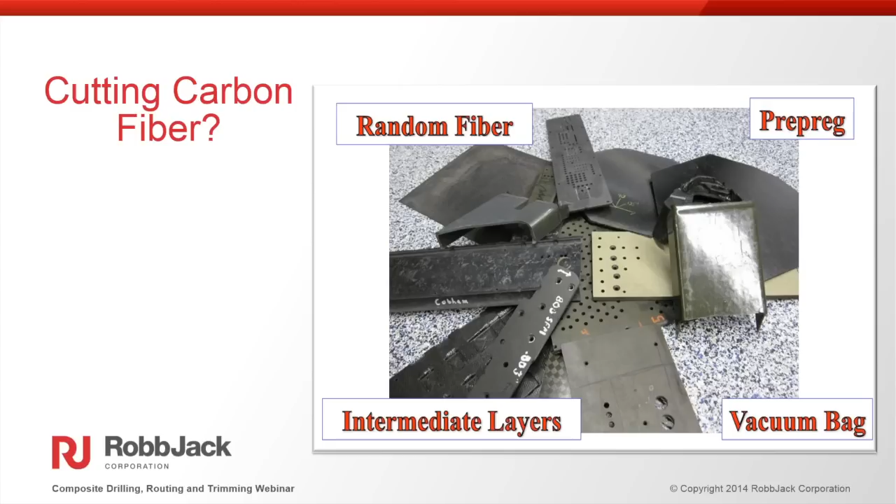As a general rule, when cutting different composite materials, the farther away the weave is from the outside top and bottom surface of the composite, the easier it is to cut. So if you're in the development of the composite material and have the ability to change that—which in most cases you don't—if you can get that weave a little further away from the top and bottom layer and have a good resin percentage on top and bottom, it really aids in drilling and trimming of composite materials.

So when cutting composites, rigidity is one of the areas often overlooked in optimizing composite machining. When the part is vibrating, your tool life is going to suffer. So the more rigid the workpiece is, the longer the cutting tool will last, and the more predictable the process will be. Speeds and feeds will also be faster if you have a nice rigid part and fixturing.

It'll also help with predictable tool life when everything is nice and rigid. The most common fixturing is vacuum, and if that vacuum fixture can match the part as closely as possible, it'll really enhance the rigidity of the part. I've seen a lot of companies spend a lot of time maximizing the rigidity of their fixtures at the beginning of a run, and it usually pays huge dividends in repeatability, quality, speeds and feeds, and consistency later on in the process.

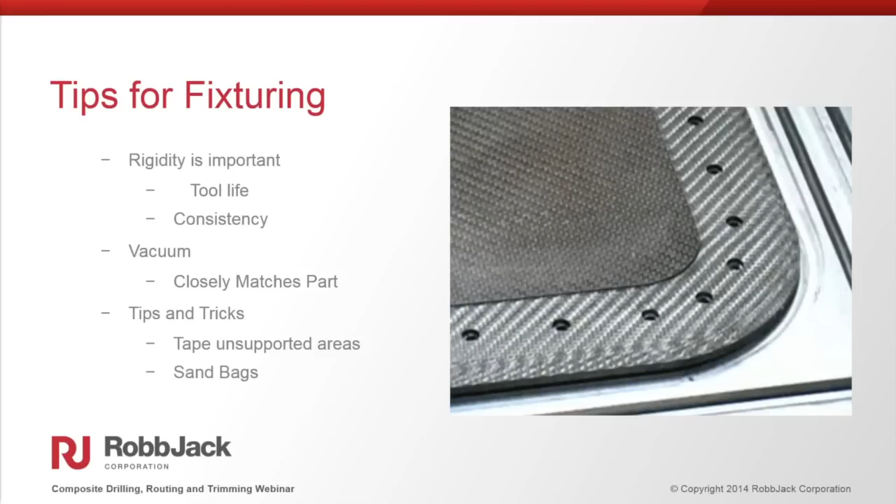Sometimes you can't always have a vacuum fixture that matches the part, because you're doing a short run or it's not a production type environment. So you don't always need the high-cost solution. I've seen something as simple as having an area of the part that's not very rigid and using sandbags to dampen that vibration. It's also pretty common to have a family of parts—you may have one fixture that many parts go onto, and some of those parts may not match that fixture as well, with corners sticking up off the fixture unsupported. Some solutions that work really well are strapping or taping down those corners to the fixture. Anything you can do to increase that rigidity will really make it a reliable process.

So when choosing drills to make holes, typically there are three common types of drills used in composite hole making: solid carbide, diamond coated, and PCD drills.

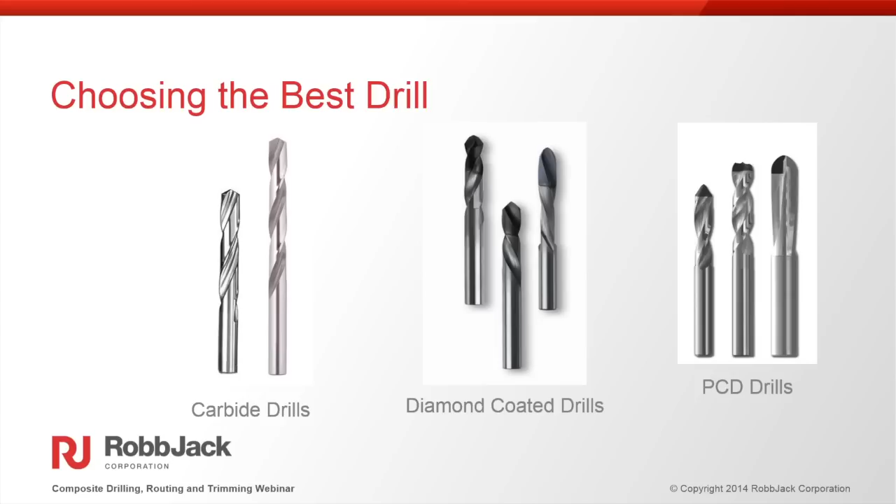Carbide drills are usually only used for manual operations because of the poor tool life you get. Usually when you start wearing out those cutting edges, you get really poor hole quality unless you only have to do a couple holes. So in most applications, we'll focus mostly on the diamond coated drills and the PCD drills for our presentation.

When using diamond coated drills, diamond coating is an excellent choice for a drill, and in some applications you can actually get longer tool life even over PCD drills.

Many of the tip geometries that you're able to do on carbide tools, you're able to do for diamond coated, because what we're doing is taking a carbide blank, leaching out the cobalt at the cutting surface, and growing diamond on the cutting edges. So essentially it's a carbide tool that we've grown diamond on the cutting edges to create that diamond coated tool.

So you're pretty much limitless on the types of geometries you could put on there. You can see this top tool has an 8-facet tip. When you pierce through the material, you'll get a little bit of delamination, and then the double angle will ream out the hole as you finish it to get rid of those uncut fibers and delamination.

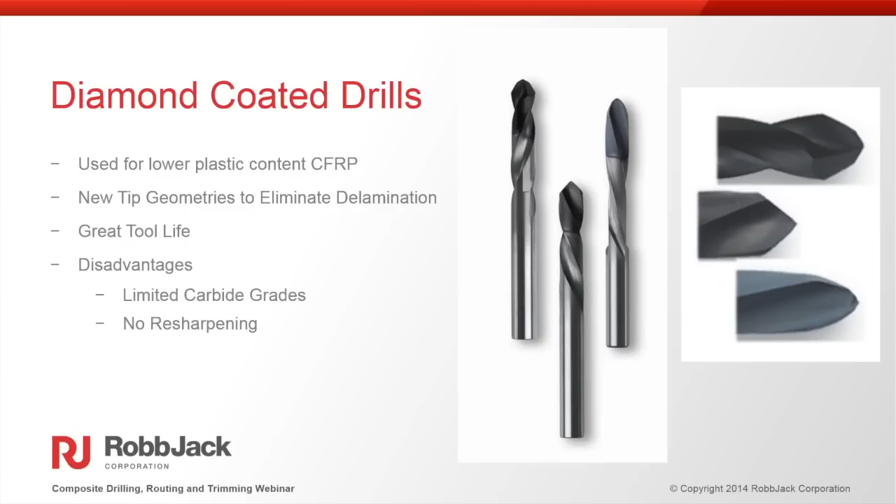So all these drills tend to be really good problem-solving tools when you're trying to make a hole in a composite material, especially carbon fiber, because of its abrasiveness.

On the PCD drills, they are an excellent choice for drilling composites and carbon fiber. The PCD tools tend to outperform the diamond-coated drills in higher plastic content materials.

The reason for this is they start and maintain a little bit sharper edge because we're actually grinding those edges instead of growing the diamond on the cutting edge from a sharp edge and then growing it on there. On the PCD, we're actually grinding those sharp edges, so the edges are able to have a little bit sharper cutting edge. What's really exciting about PCD in the last year or two is that PCD in the past has been really limited on the drills.

The two main technologies that were used: you had a flat piece of diamond that was brazed onto the carbide, or you had a vein technology that was a little bit harder to get that raw material and kind of limited in the geometries you were able to get. You had to make custom veined tools to get that geometry.

But in today's technology, we can go in with a solid tip piece of diamond, so that whole black end of the tool is diamond. So we're able to essentially have all the geometries that we had on carbide tools, but now with a very wear-resistant PCD on the cutter. So we're limitless on the types of geometries we could put onto the tool.

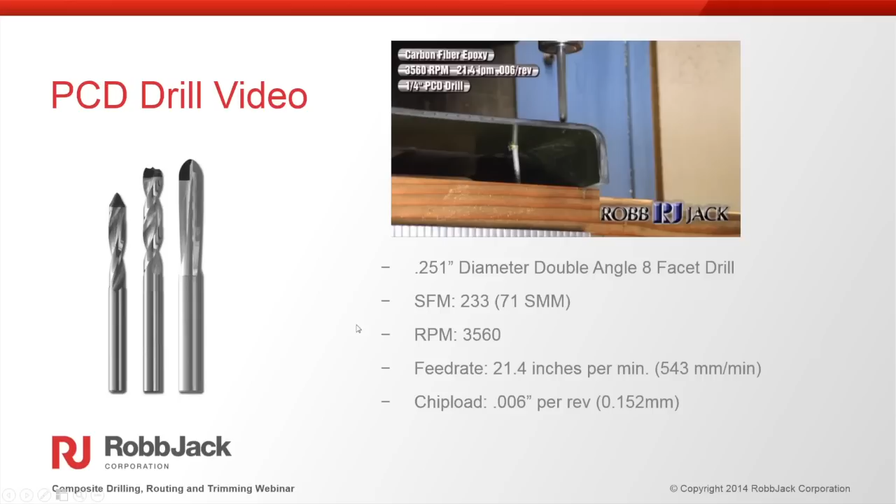So here I'm going to show a video, and remember the video may not show up as full speed on your screen, but essentially what we're doing is we're taking a 1/4 inch, .251 diameter double angle PCD drill. It's going to be going at 233 surface feet per minute, which is 71 surface meters per minute, or for RPM, it would be 3560 RPM, and a feed rate of about 21.4 inches per minute, with about a 6 thousandths per revolution advancement.

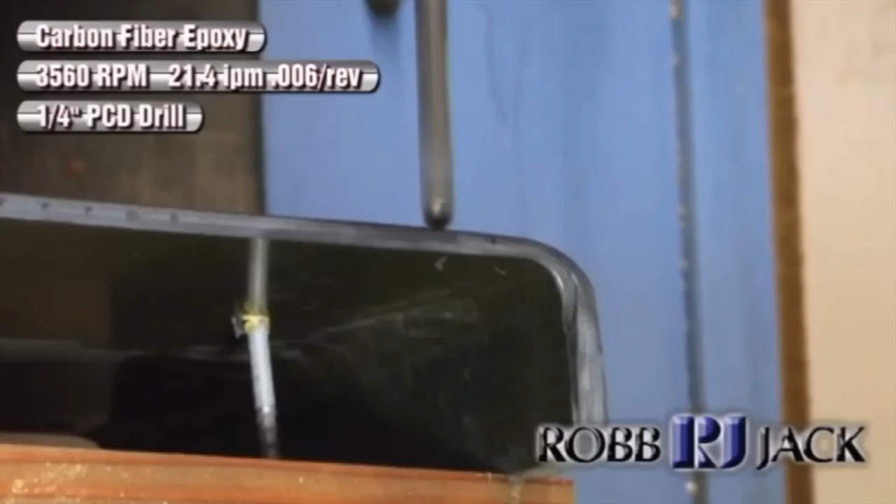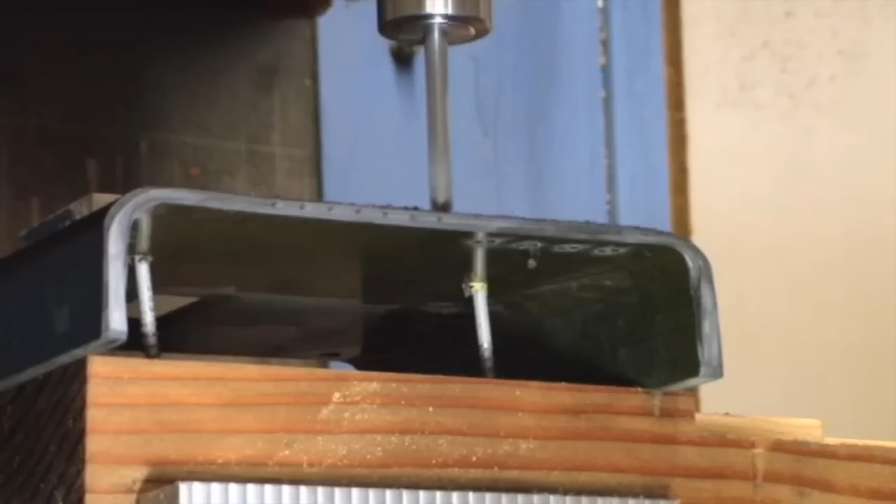So to note when you're watching the video is that the holes we're going to do, look at the exit hole. We're able to make these holes very quickly at a fast feed rate with no delamination or uncut fibers at the back side. That little white ring you're seeing is just dust being deposited on there. As soon as you wipe it off and look at the finished part underneath the microscope, there are no uncut fibers or delamination. By having really sharp cutting edges, the really clean geometry specified for composite materials, we're able to cut really clean holes with no delamination or uncut fibers.

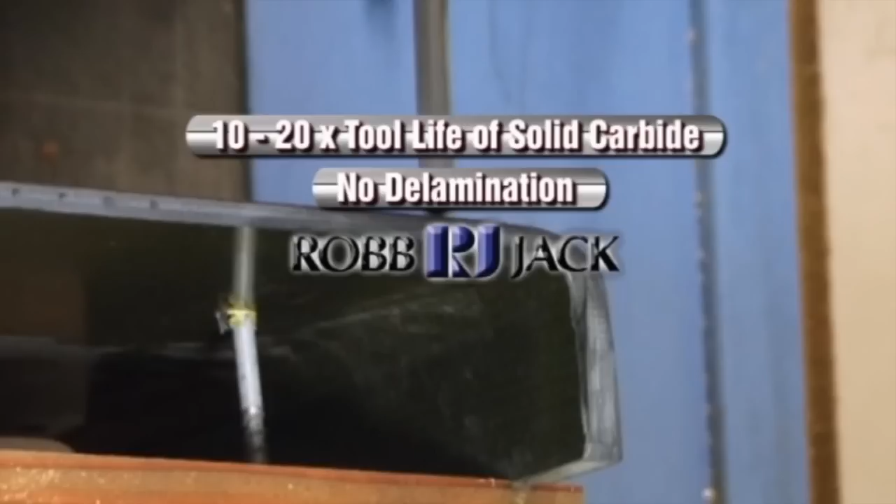And you can get typically anywhere from 10 to 20 times tool life over solid carbide.

But by coming up with a composite dovetail tool that can not only put the dovetail but trim the part in one application, and because we make it out of a solid carbide blank, we have the ability to diamond coat it. You get really long tool life, and we've eliminated operations. So by coming up with a combination tool that solves a problem, you can save millions of dollars over the production of the part, and in this case, that's what we've done. We've saved numerous hours per part and saved the customer a considerable amount of money.

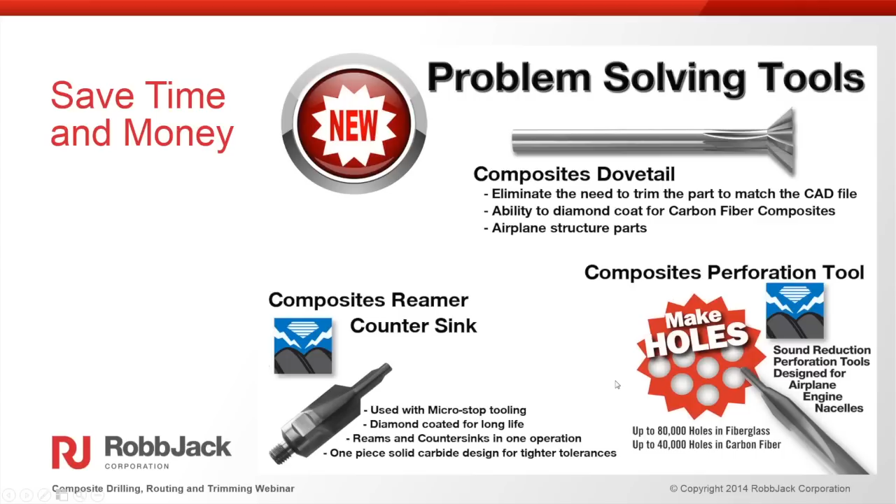The application for that style of tool is anytime you have to do really small diameter holes, and a lot of them - a common application would be acoustical treatments for aircraft engine nacelles, blocker doors, things like that. In this application, they had to generate 90,000 holes at 50 thousandths diameter in a carbon fiber sandwich structure. They tested about 10 to 15 different manufacturers, and each manufacturer may have had 1 to 5 different types of geometries developed to try to solve this problem.

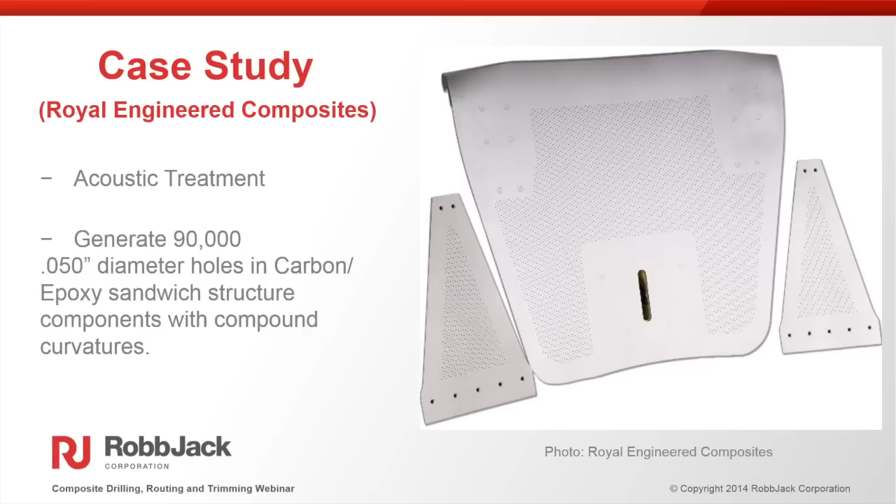And we developed an excellent solution for this. Essentially what they're looking at is when they do these holes, they need very nice part integrity, and the holes need to be nice and round, as well as not have any kind of delamination.

So what you're seeing are holes showing the entrance on the left, exit on the right, at 3,500 holes after the tool had cut 3,500 holes. On this first one, you see a halo effect around the outside of the entry hole, and that halo effect is actually delaminating that adhesive layer there, which affects the integrity of the part. On the exit, you're getting a little bit of tear out or uncut fibers, so you don't really get that clean cut.

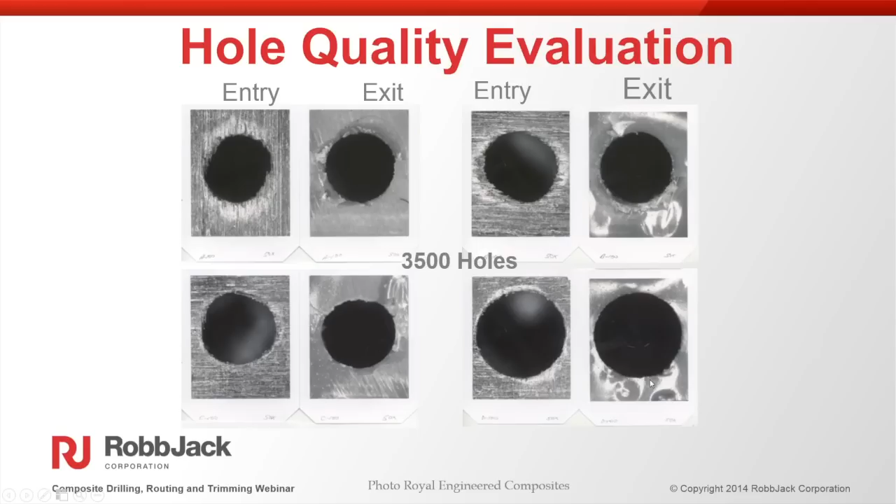And you have a variation of all that. You can see this one actually isn't even that round of a hole, so there's some walking going on. Their part had curvature to it, so some of the drills and other designs had problems with walking and unround holes. But for the solution we came up with, we get a very nice round hole in the lower right that on the entrance and exit are very clean.

When we looked at the cross-section of these holes, you can see all the different kinds of problems they ran into - little cracks and delamination of the fibers in the circled area, areas where we have uncut fibers on the top edge. Here's another example of uncut fiber. We had fiber pull-out problems with different types of tools that we came up with.

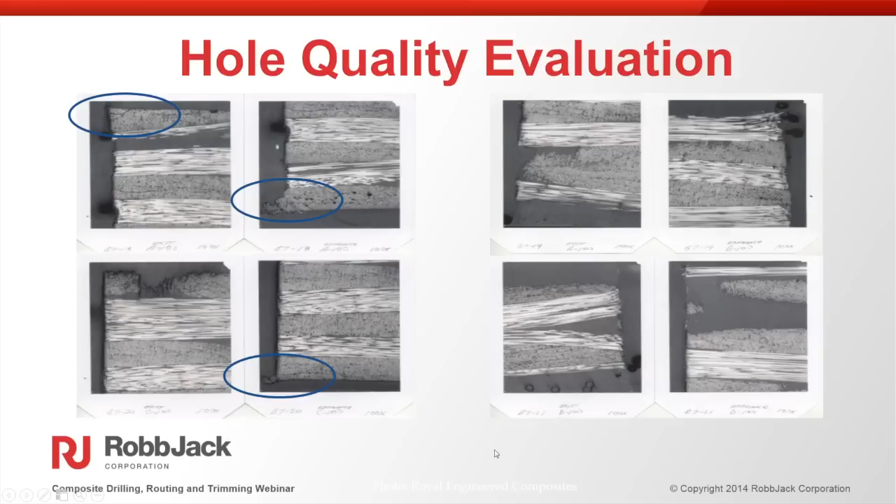So with the solution of doing this high number of holes with very small diameter tools, we found there were a couple critical areas to get success. The critical areas ended up being: we had to design the diamond coating to have very good adhesion to the carbide geometry. Because if you have awesome geometry but your diamond coating doesn't stick to the carbide, essentially you have a very expensive carbide tool - and it's actually even worse than just having a straight carbide tool. So that adhesion was very important to figure out.

The other problem we ran into was when we first started this testing, we weren't getting the high number of holes and predictability - it was very varied. When we looked into it further, and the customer looked into it, we found that the speeder used on the spindle was actually lowering the RPM. So it's really important in applications to make sure we have rigidity in the fixturing, but also in the spindles and speeders you're going to use. For this example, the speeder was slowing down, so the feed rates and chip load per tooth were not consistent, and that was throwing in the variability. Once we switched to a really nice, high-quality speeder, it solved all those problems.

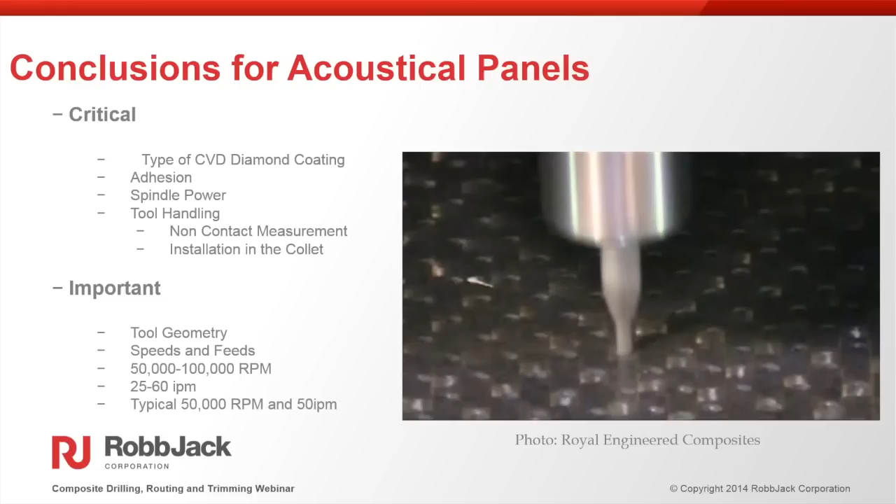Once we figured out the geometry, the speeds and feeds for the operation, the coating, and other areas, this application became extremely successful. Typical speed and feed for doing a 50 thousandths diameter hole in a carbon fiber part is usually about 50,000 to 100,000 RPM and anywhere from 25 to 60 inches per minute. For our testing, we typically go about 50,000 RPM and 50 inches per minute.

When choosing what tools to use for trimming, it's very similar - you have the same type of options. You have carbide, diamond coated, and PCD. For trimming applications...

Carbide is usually used if you have an unrigid machine or poor fixturing, because the cost of the tool is usually a lot less. So some of our customers, if they have applications where they don't have a very rigid setup and need to do heavy trimming, might trim with the carbide tool and then come back with a diamond-coated or PCD tool just to finish a light cut. If you have a rigid application, you don't have to do that. You can come right in with a PCD or diamond-coated tool and cut in one shot, and you don't have to do that roughing and finishing application.

One of the things we'll get a little further into is that a lot of people apply carbide tools the way they're used to - at high RPMs and slower feed rates, which tends to be more of a grinding operation. But when you go over to PCD or diamond coating, you have that wear resistance, and you don't want that high RPM, slow feed rate application. You want to get in and out of the cut as fast as possible because now you have sharp cutting edges, and it tends to not be as much of a grinding operation.

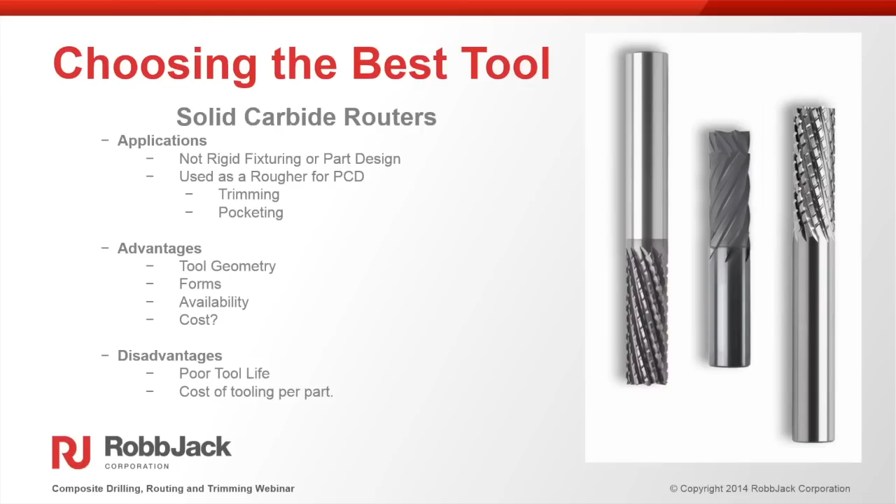Some of the advantages with carbide are unlimited tool geometries and forms, and a low cost. But the disadvantage is that initial low cost comes with a high cost for production, because you have such poor tool life with carbide in most composite materials - I've seen cases where just cutting 6 inches, the diameter of the tool is already 10 thousandths smaller, just from cutting a very short distance. So in a lot of cases, it doesn't work very well. You'll have a lot of uncut fibers and tearing of the surface when you only use carbide.

When you get to the diamond-coated tools, you have pretty much the same availability of geometries, because anything you can grind on the carbide, you can do with diamond coating as well. So you have that advantage. But typically, the diamond-coated tools are used in composites for trimming in heavier applications where the carbon fiber is a little easier to cut, because sometimes with a very difficult carbon fiber, it'll tend to delaminate that diamond layer.

So where we said diamond coated and PCD are excellent for drilling, on the trimming side we've seen more success with PCD versus diamond coated, but we do have a lot of customers that use our diamond coated tools for trimming applications. Typically, the diamond coating works better in lower plastic content composites. When you get into higher plastic content, the slightly sharper edge of the PCD tends to work a little better.

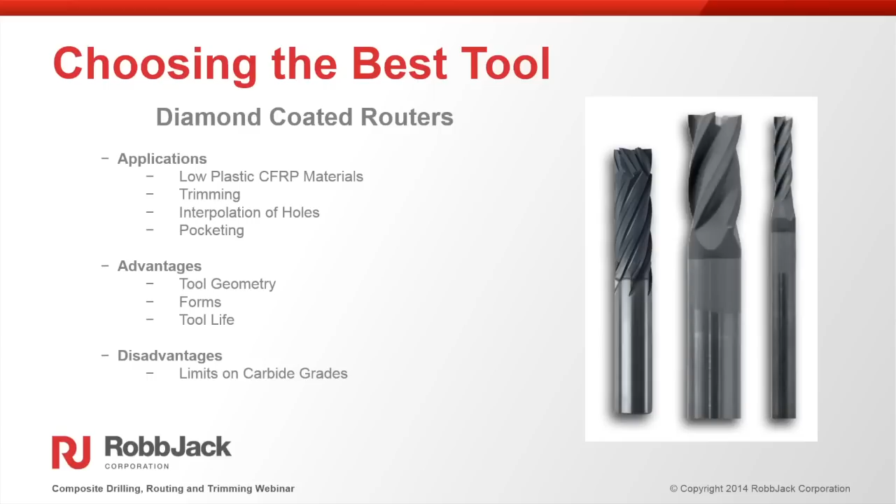The other thing to remember with anything diamond coated is the limits on the carbide grade. When you diamond coat, as we talked about earlier, you leach out the cobalt right on the surface where you're going to coat and then grow the diamond on there. Why we leach out that cobalt is if you don't, you'll form a graphite layer before you grow the diamond, and the diamond coating will just wipe right off. So you can't take every carbide tool and just get it diamond coated - it typically has to be a specific carbide grade that's compatible for diamond coating.

When trimming, most people use our PCD tools. The straight flute puts a neutral force on the part, so it's not putting an up shear or down shear on the part. It works really well if you have that rigid fixturing. They also work really well where you have sharper cutting edges for your higher plastic materials.

It gives you excellent tool life, and you have the ability to resharpen the tools. The initial cost for the tool is a little higher, but the overall cost ends up being a lot lower. So if resharpening is important for you, or long tool life, the PCD tends to work out really, really well. One of the main things we see with a PCD failure is misapplying the tool.

A lot of times, when we run into a failure with PCD, we find out that the customer is using it the same way they would use a burr style tool in carbide - running at really high RPM, very slow feed rate, taking lighter cuts, multiple passes. Where the advantage with the PCD, and the video we're going to show, is typically we can cut right to net shape in a single pass, with no need to rough the part and finish it or use multiple tools. A lot of times in this trimming operation, we'll be able to use the tool full depth, one pass, right to size in one shot.

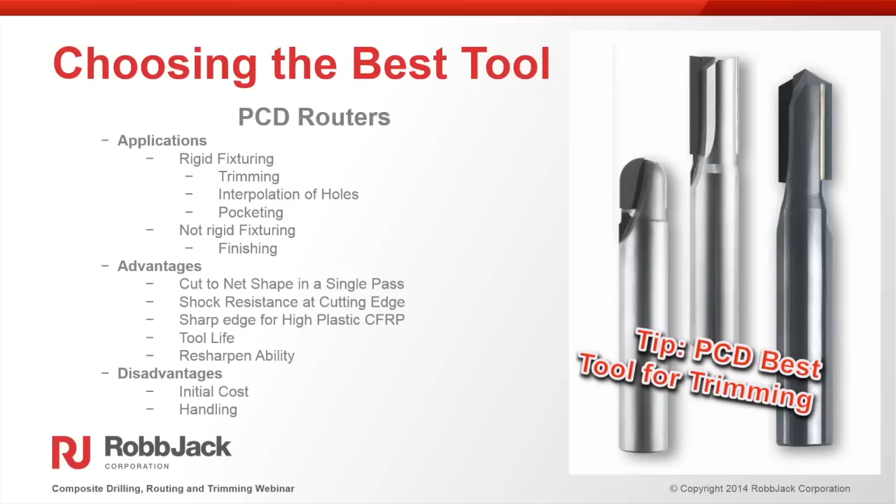That saves cycle time and actually reduces the number of linear inches that the tool sees, so it actually gives you longer life. So in this video, it's a 3/8 diameter router.

Or 9.53 millimeters, and we're going to be going 982 surface feet per minute, which is slower than some of the trimming that I've seen at a lot of places. A lot of times we have to recommend a little bit lower RPM, but then a lot of times faster feed rate. A lot of times people will be going 18,000 RPM with a 3/8 tool or 20,000 RPM, but then going like 20 inches per minute feed rate.

So typically we recommend 10,000 RPM, anywhere between the 900 and 1,000 surface footage range, and about 80 inches per minute feed rate, which is over 2,000 millimeters per minute. So the chip load is 8 thousandths per revolution.

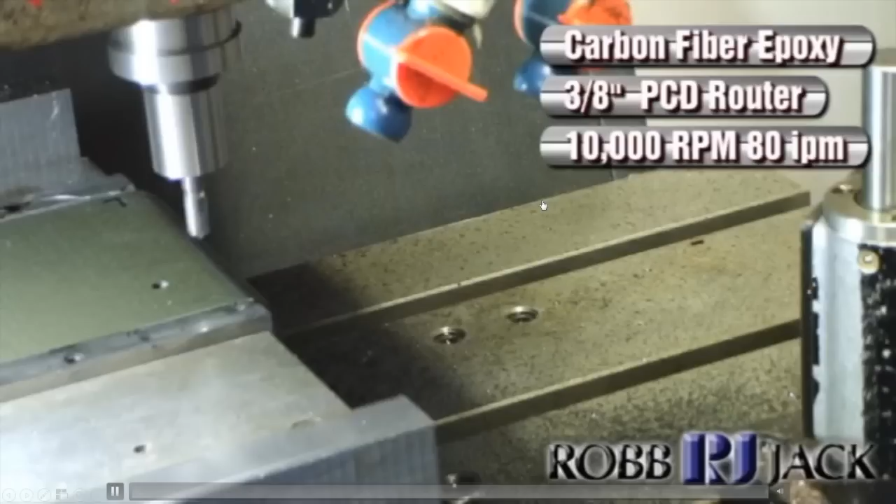This is the video that you may not see that full speed on, but just know that it's full shot, full depth, one pass, and we're cutting it at 80 inches per minute. So when we cut the material, we're not sitting there rubbing the tool.

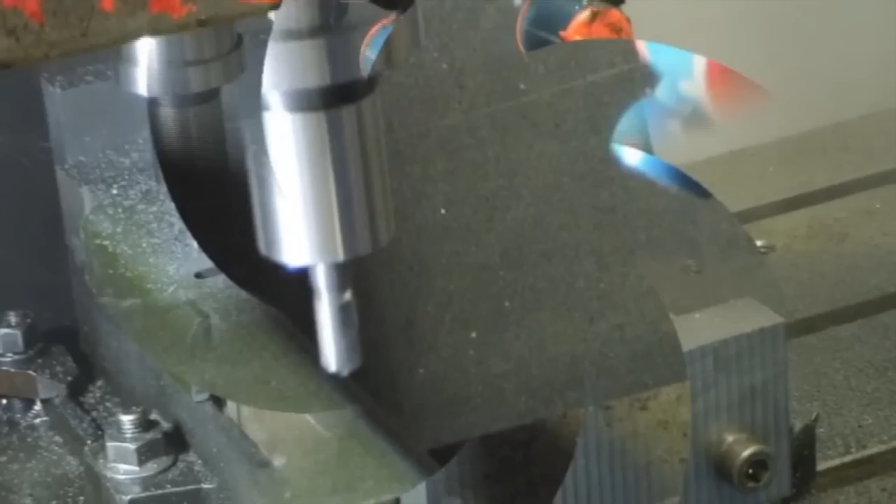Some of the advantages of that is we have that nice sharp edge because we have diamond. Then we're shearing the material and not generating a lot of heat. When you grind, you generate a lot of heat, so then you can have problems with melting layers and plastic content.

I'll go ahead and play this video one more time so you can see it. The tool goes down one shot, cuts it to shape in one pass, and when you look at this part, these edges are extremely clean, sharp. There's no uncut fibers, no delamination, and we can hold very tight tolerances.

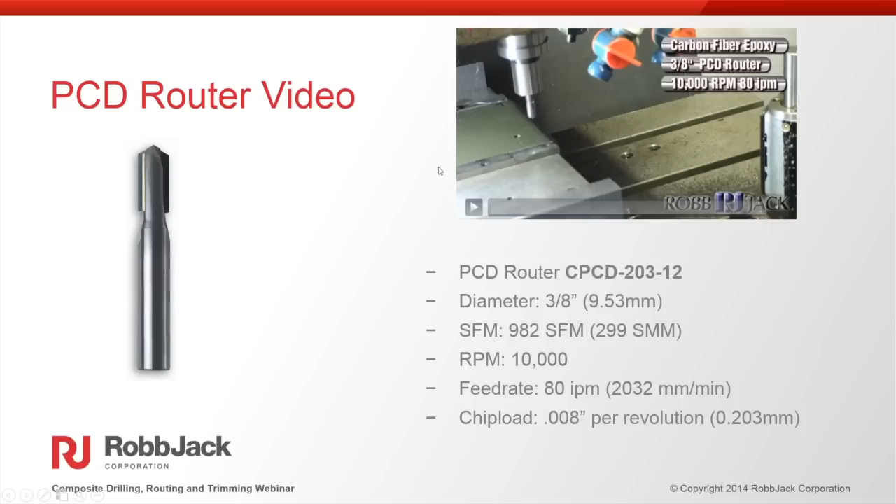In some of the talks that I've done, people are a little bit reluctant on going to one pass right to size. In most aircraft applications, that's what I find once you get a good tool and a good operation, you can do. You typically do not have to do any finishing operations. We can hold most tolerances a lot tighter than what is required doing it in that one pass.

So on troubleshooting, what tools should I pick? What things can I use for the application on trimming? Most of the time, people are going too high of an RPM. The RPM range depends on the material and how much engagement you have.

But worst case scenario, for tools doing full slots, we can run that 800 to 1,000 surface footage, which is a pretty good range. So for a 3/8 tool, 8150 RPM to 10,000 RPM, and then the 1/2-inch tool is around 6,100 RPM, which is typically a lot slower than we see people using the tools.

But in our testing and research, you get the longest life, and you really get rid of that abrasive wear out of the tool when run at these speeds and feeds. On the converse side, we see a lot of times people going too slow on the feed rate, so then they're just rubbing the tool, building up heat, and you get premature wear.

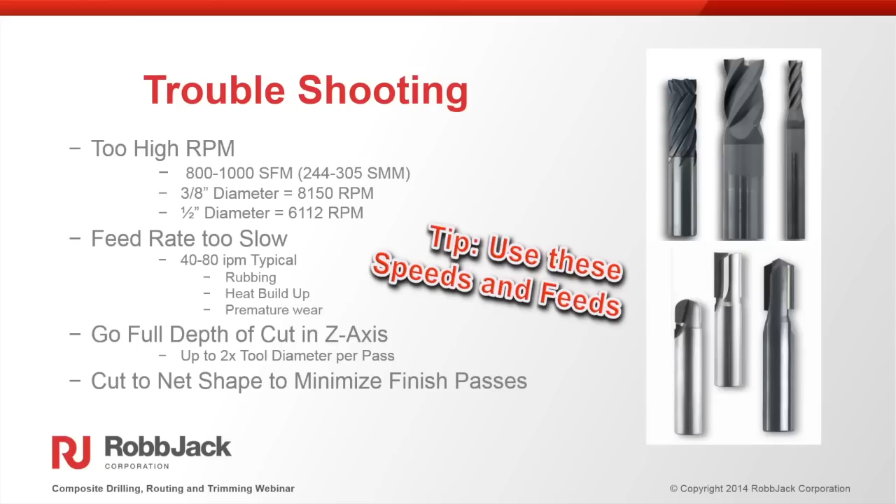To kind of recap, using the right speeds and feeds, the right depth of cuts, you can typically go up to about 2 times the diameter in depth of cut per pass. And if you cut the parts right to net shape, you really minimize cycle time, and you get longer tool life.

On the tool handling side, this is another area where you'll sometimes see failures, or people say, I've tried PCD or diamond coating and it hasn't worked really well. You really need to address the tool handling. You don't want to use any kind of contact measurement, any kind of vision system.

If you do have a probe where you're getting your Z offset on the tool, you can do things as simple as using a plastic shim or even a piece of paper in between the tool and the part, and then just compensate for that. All different kinds of solutions, from high tech to low cost, low tech. A lot of things can work, but you really want to make sure, if you're going to be using PCD or diamond coated, or even carbide chips very easily as well, to get that repeatable performance, you really want to concentrate on the handling of the tools.

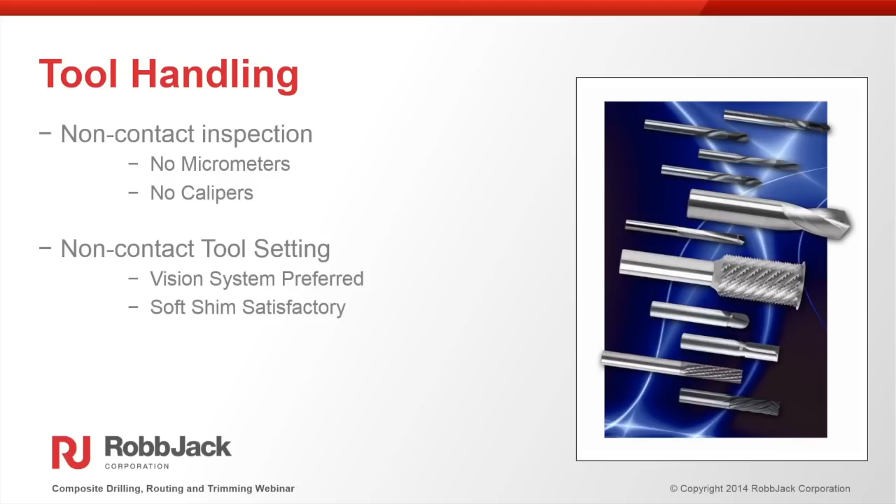To get the other things, think of this as a process. We talked about fixturing, programming, speeds and feeds, and tool selection to best use. Think of it as a process. I hear a lot of people have many problems with composite machining. If you address tool selection, the type of tool to use, the programming, the fixturing, the tool holders, all of that, it ends up being a very robust system where you get 13,000 linear inches out of the tool, and it's very repeatable. You really can take away a lot of the pains that people feel in composite trimming and drilling.

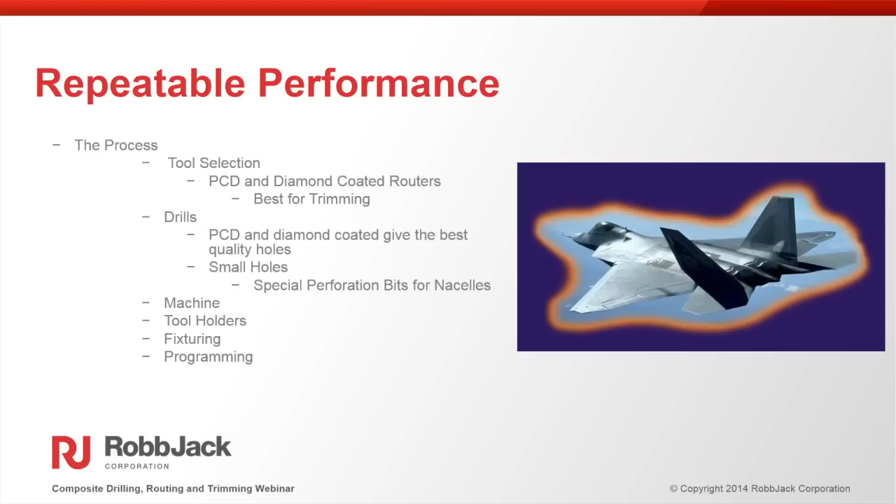The first question is, what type of carbide substrate do you use with diamond-coated drill bits? The type of carbide substrate you use is typically a 6% carbide that has either a 1 micron or sometimes even a little bit larger than 1 micron carbide grade. It is a carbide grade available out there. Most cutting tool manufacturers, if they don't have diamond coated tools in their line, tend to use only one carbide grade, usually a 10% micrograin. So you're not able to diamond coat that, or if you are, you get sporadic results. So the best carbide grade for diamond coating is a 6%, not sub-micron grain.

If you have any questions on specific carbides, you can give us or Crystallume a call, and there's a list on the website you can go to and find what type of carbide works really well. Okay, all right, thanks Mike.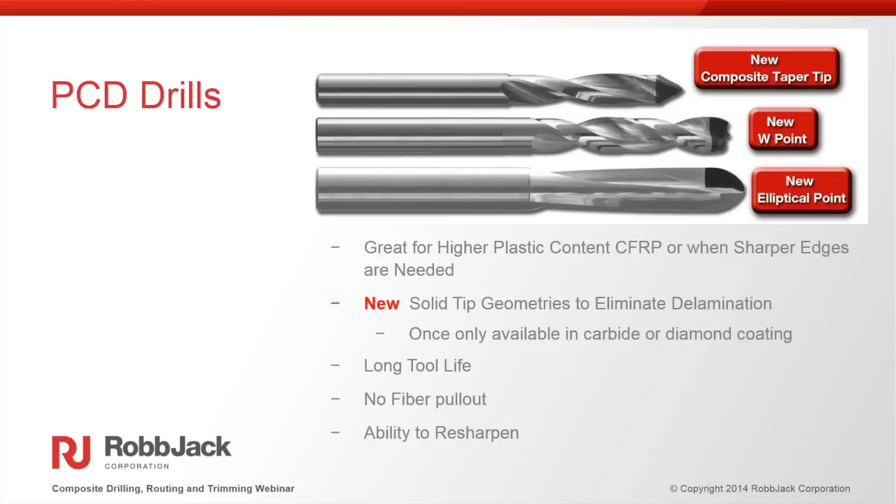Here's another one. Is the diamond tip tool line actually a monocrystalline structure on the tip, or is it polycrystalline? The examples I showed on that slide of these tools are not monocrystalline, they're polycrystalline. The difference is, in the past it's been a very thin disc, and these are about 3 millimeters thick, solid pressed diamond on a carbide disc. So we're actually brazing the carbide to the carbide, not brazing the diamond onto the carbide. They manufacture the diamond in a disc at that 3 millimeter thickness, so we can put any kind of geometry we want on it. But it is polycrystalline, not monocrystalline. I don't know of anyone making monocrystalline diamond for composite drilling. I could be wrong, but personally I don't know of any.

Our third question: you talk about plastic content, what percentage of plastic content would you consider high, and what would you consider low? That's a very difficult question because I made a very general statement of high and low plastic content, but there are other variables—the weave, the saturation, how loose it is. What we found is if you have composite materials where the fibers are not really held by a resin or plastic material, where once you start cutting it, it almost appears like a fabric instead of a solid rigid structure, none of the cutting tools tend to work very well in that environment. So when we say higher plastic content, anything that requires the sharpest edge possible, the PCD tends to outperform the diamond coated. If you don't need quite as sharp a cutting edge, the diamond coating will sometimes outperform the PCD. So unfortunately, every piece of carbon fiber we get tends to be a different solution.